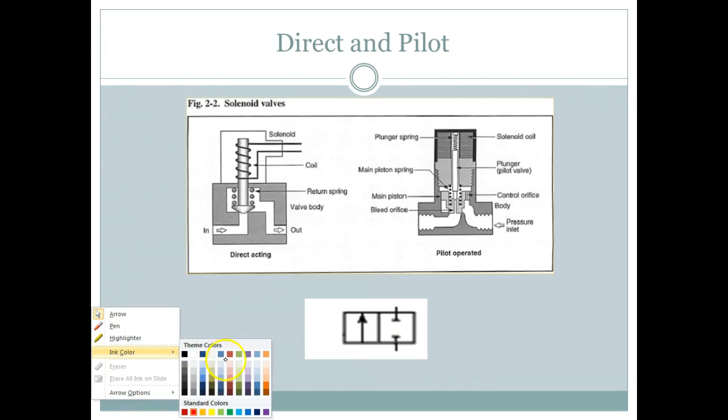So what you got to picture in your mind is you got to picture these two blocks. Now the outside, these guys right here never change positions. Oops, sorry. So these things never change positions.

And what we do is we're going to shift this thing over. So what's going to happen when we shift it over, then this is going to come over there and it's going to line up with the pipes, and this over here is going to be over here. That makes sense.

So what you got to picture in your mind, they draw the valve in its normal position. So this would be what we call a normally closed valve. And then when you turn it on, in your mind, you got to see that symbol shift over. And when we shift it over, what lines up? Well, that arrow lines up now. So now the fluid can flow in the direction of the arrow up to our actuator.

And this would be a symbol of what we call a normally closed - what would we say - two-way, two-position, normally closed valve.

Now we hadn't showed you how we shift that thing, and this is the way these different operators work. We can shift that thing manually, or we can shift it electrically, or we can shift it with fluid. And that would be what we call how we operate it. The book calls it actuators, but I call them operators.

We can shift it manually, or we can shift it electrically, or we can shift it with fluid pressure. We call that pilot. So we can shift it with the pressure of the fluid itself.

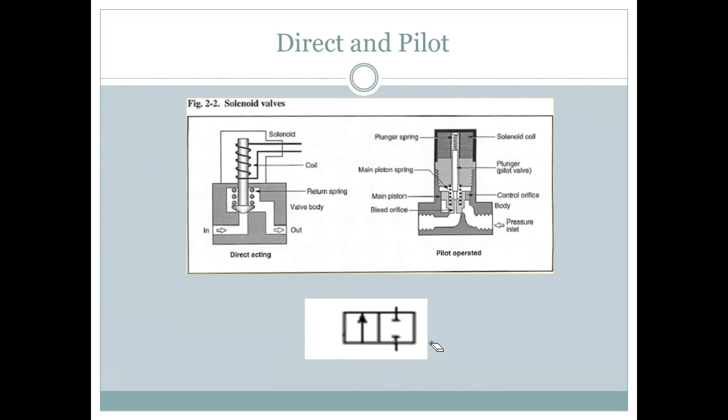Anybody have one of these? No? I got a couple of them going on right in here, right now. This is what your heart valves are - they're check valves. So when your heart is pulling it in, that's one valve open, right? The other valve is closed. And then when it pushes out, it opens up the other valve. So it's really, really neat. It's pushing out one side and pulling in the other.

We don't want the part that's going out. So your heart pumps - what would happen if you didn't have a check valve? Your blood, instead of going out, it would do what? Yeah, this is what happens a lot when people get electrocuted. Their heart goes into fibrillation. Their valve gets out of sync with their heart, which means you create no pressure.

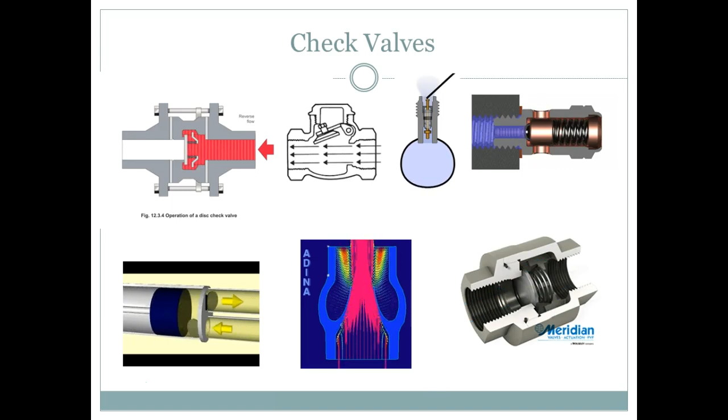So this is one of your simpler valves. And what's the symbol for this? No matter how it works, that on the top is the symbol, but we got one little more thing we need to put on it. If it's got a spring on it, then what they do is they put this little line on it like that. That means it's got a spring on it. It's also a symbol for spring. We don't have any resistors in here, so if you see it on our drawing, it's a spring.

I always wonder how they control a hydraulic jack, because if you use the same pressure... now what's that check valve in there? So when you push down, it opens up the check valve, and when you raise it back up, the check valve closes. So it doesn't let it flow back into your reservoir. So you got that reservoir in there, right? Same thing's true, but that's not true on the brakes - your brakes don't have to do that. But I was curious how at some point the pressure lifting up the car would be greater than what you push down. I know it'd be harder as you go along. So I always wonder why that pressure did not come back.

Because the check valve gets it on the way up, and then you got a bypass that bypasses the check valve, right? You understand? So when you go over there and turn that little thing, all you're doing is bypassing the check valve and letting the fluid flow back into the reservoir. That's all you're doing. So you got a check valve, and when you twist that thing in, which is probably a needle valve because you can control that flow pretty precisely, you can let your car down fast or slow. So you raise that thing out - in fact I've had it all the way out. It is a needle valve. Then you pump it. It's got that check valve that don't let it do that. So you got a lot of pressure going down, and when you come back up...

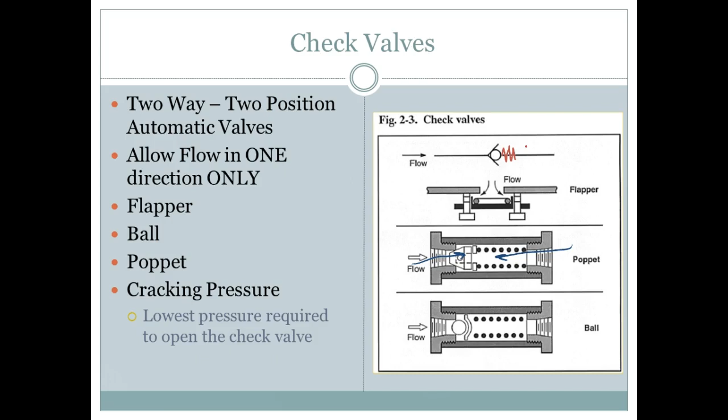Are we okay? Spring return - everybody okay on that? So what we got to understand is that if it's got a spring on it, and most of them do, because if it didn't have a spring, then you would always have to mount it in the same direction, right? You understand? But if it's got a spring, then we can mount it any way. So most of them have a spring. And if it takes 5 psi to operate it, then you're going to lose 5 psi going through the check valve. Everybody understand that? You got to overcome that. So you got to maintain that 5 psi here, right? You understand? Everybody okay?

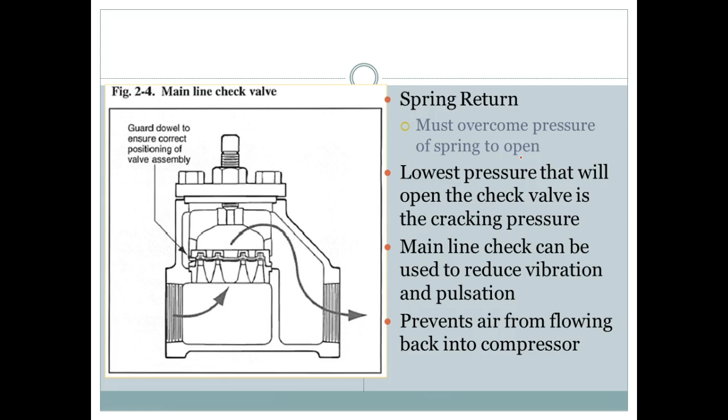So this is Nancy's right here. She was looking at this and just said, okay, what about the top one up there? How much pressure would it generate? So that's the spring. She's got 3 different pressures that operate the check valve.

By the way, this is the symbol of a pump, the symbol of a hydraulic pump. A compressor uses the same symbol, but on pneumatic, that triangle you see right there won't be filled in. So that's basically the big difference on the symbols - hydraulics, if it's got any arrows, they're going to be filled in. If it's not filled in, then that's going to be pneumatic. So a compressor would have exactly the same symbol, but the arrow would not be filled in. So what about the top one? How much pressure would that generate?

It's going to generate as much as the pump will do, because the flow is against the air. The flow is seating, right? Do you understand? Yeah, the flow is pushing the ball into the seat.

It won't flow, so how much pressure? We don't know. Now look at the bottom, they're pointed in the right direction. So the flow is against the air, and you can see what's going to happen when it flows. What's it going to do with that ball? It's going to push it back. So how much pressure would our pump generate here?

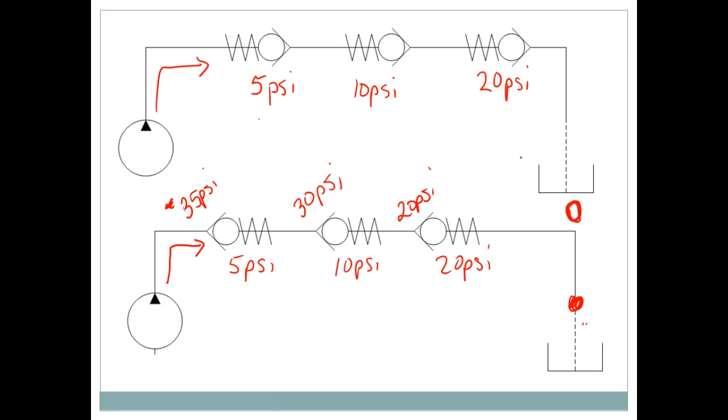So what about on the top one? No flow. What about on the bottom one? No 5, the other 2 won't open. As soon as that top one opens at 5 psi, then it goes over this. Now we have 0 psi. We have 5 psi on the left, we have 0 psi on the right. So the 10 and 20 would never open. Y'all understand that? Yes.

I don't know why she did that. By the way, on the right hand side, that's the symbol of a reservoir. Most people call that a tank. So on a hydraulic system, we have to have a tank, right?

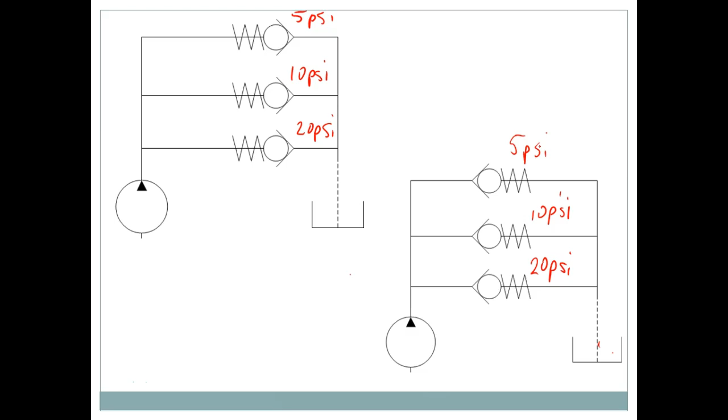They don't have power supplies on them. A lot of your big ones and more expensive ones have computers and everything and proportional controls. But a lot of your older earth moving equipment, it's either go or no go, right? And they have that, it's a lever operator.

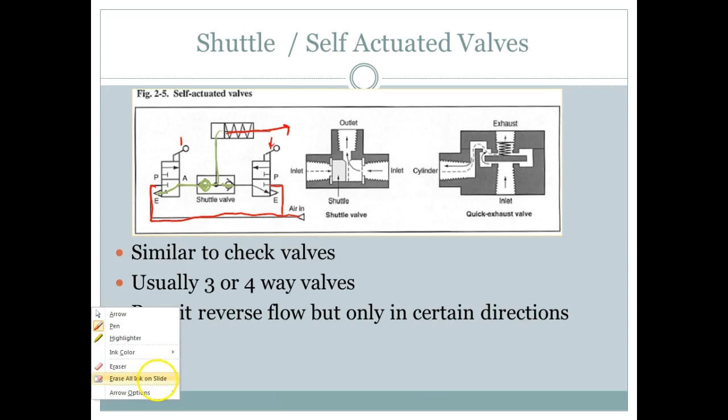Shuttle valves, are we okay? And that's the symbol of a shuttle valve. How do they do it? Well, I don't really care, I mean, it does it. How they do it, I don't really care, because all I need is the symbol, then they're all going to operate the same, no matter how they do it, right? Does that make sense?

This is the symbol of the shuttle valve right here. We okay?

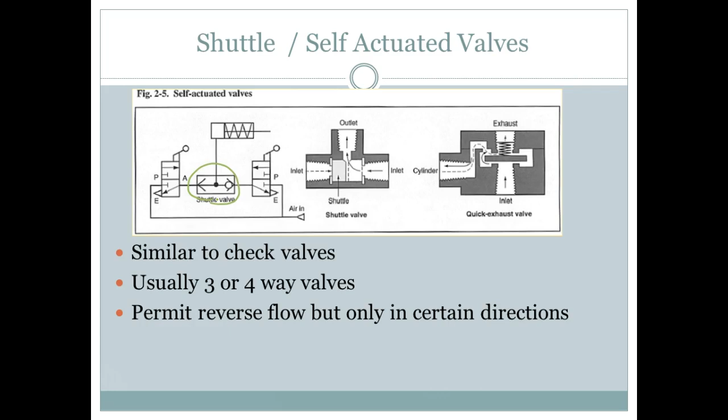And this is a shuttle valve, this is animation, and you see it here. They're using a flap, so when this guy comes up, the flap moves over to the left. When this person pushes at the valve, as long as the guy on the right has his control passing fluid, the guy on the left is blocked off. So what's neat here is they're showing the what in the symbol, showing the valve shift back and forth. So this is a self-actuated valve.

OR logic. If you're looking at the PowerPoint, OR logic is not up there, I just say it.

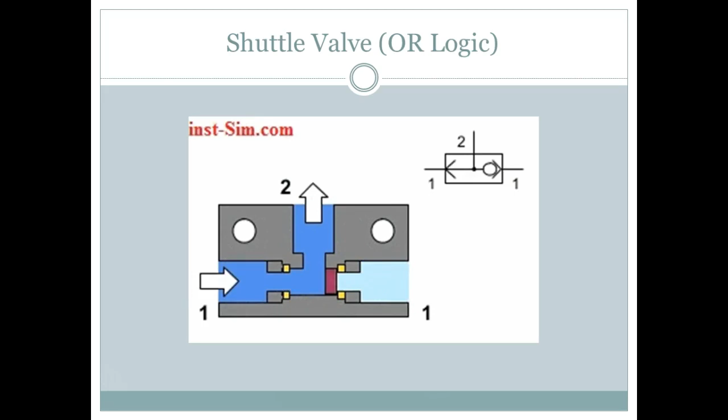A reciprocating disc is just a disc that's got slots cut into it. And then when you move it, what does it do? It lines up.

This is the one we're dealing with, this is called a spool valve. And it got the name spool because when we draw it like this, it kind of looks like a spool that you wound thread on. And somehow we position that spool to control the flow.

Now this would be manually operated, or I don't know what's over here, it looks like a manually operated. So what a manual operator looks like is this: it comes over, and then it has that up there, and it almost looks like the thing, doesn't it? And it's drawn in this position.

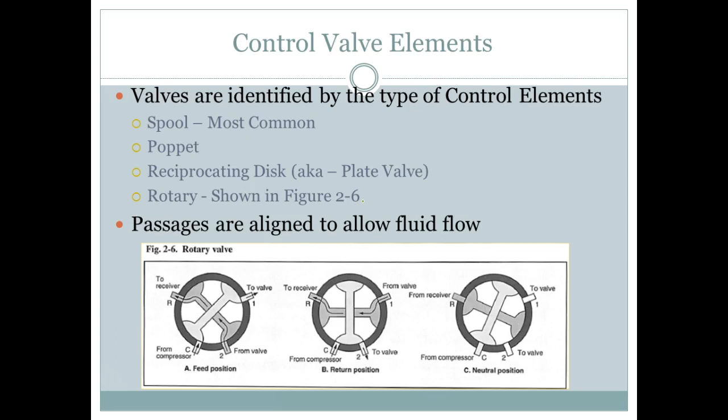Wrong way: if the line's not on the outside, then you know it's not normal, those lines are not present. These lines right here show you the normal position of the valve, the ones that come out of there show you the normal position of the valve. And they don't have to be, they could be on the right or they could be on the left, but that shows you the normal position of the valve, and that's what we're going to connect up to.

So if I was going to control something, then I would take this right here, right? This right here would be pressure, and this right over here would be whatever I'm trying to control, like a motor. A fluid power motor, a pneumatic fluid power motor, usually doesn't need an exhaust. We don't have to bring it back because why? It's got its own exhaust on it, so it sits there and spins. So this would turn a pneumatic motor on and off.

Now a hydraulic motor, we're going to have a tank, right? You can't spill it out. We can use this to control a cylinder because once we push that fluid out, we got all that fluid in the back of that cylinder. We're going to have to get it out of there somewhere, so we would have to have an exhaust. But this would be a good one to control fluid power - a pneumatic motor, not a hydraulic motor, a pneumatic.

What I'm saying, I have seen guys manufacture those boxes with no outlet. But you hadn't seen it, not unless you're just looking at symbols like this. Because what you've seen is probably this. Let's draw it like it would be in real life.

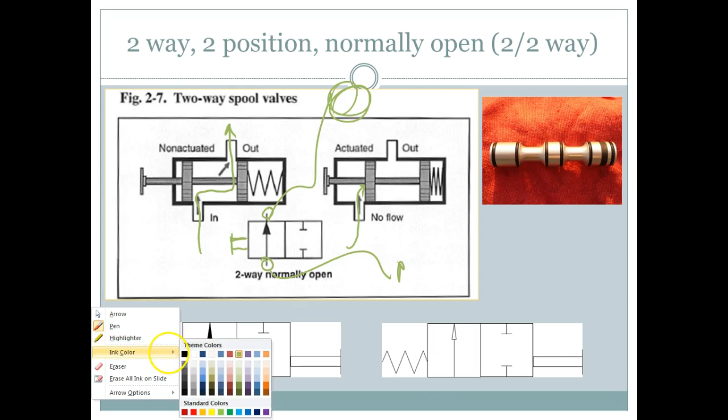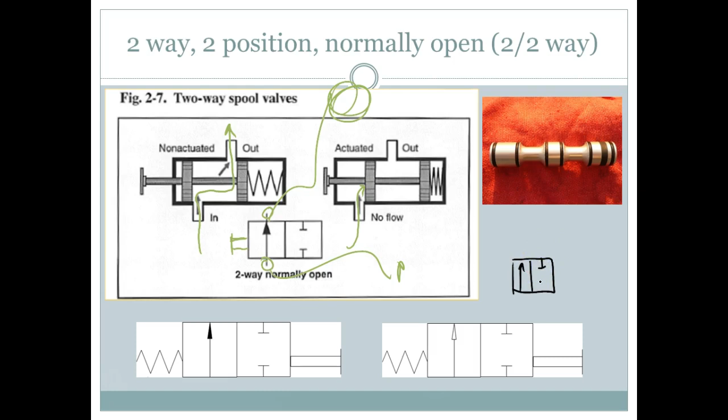So I would have my symbol, and then I would come over here and have this, and I'm going to put two T's right there. Then I'm going to take this and draw it off to somewhere, up to a motor. And down here, I'm going to take this back to pressure. And that's the way it would work.

If you don't have those, all we do on the symbol is just show you the normal position, but this is where you hook your things up, you know what I'm saying? We draw these things, we don't draw them sideways, we don't draw them upside down. The industry standard is pressure and exhaust on the bottom, and your working ports are going to be on the top.

And here they're showing manually operated spring return. So what they've done here, we don't know - I don't know if it's normally open or normally closed because I don't have what? Yeah, you don't show me where the actual ports are.

So we're drawing just the little lines, but in real life, those little lines are going to be going somewhere. Okay guys, let's take a 2-minute break.

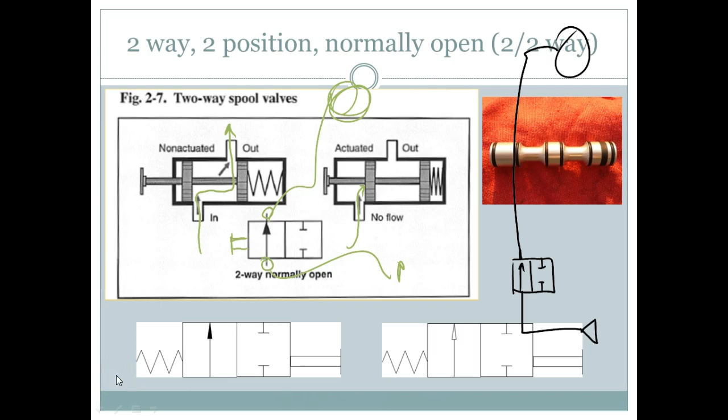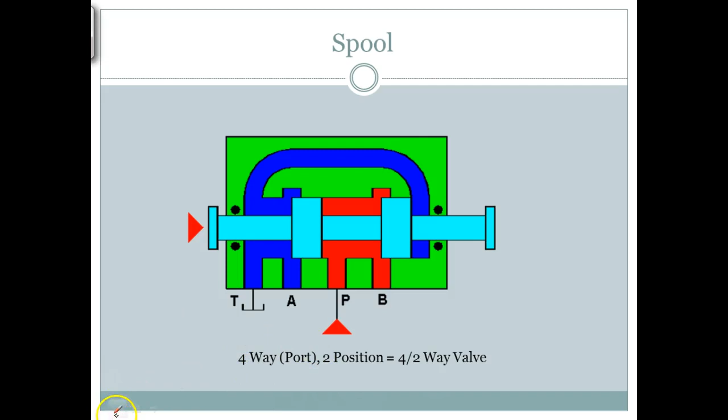So the normal position - normally on a 3-position valve, the normal position is the center position. So we draw like this, right? Everybody okay? In fact, I need to make this one over here bigger, let me make it a lot bigger so I don't have any problems.

So what we do here is notice when it's in the center position - I paused it. So right now, when it's in the center position, everything's blocked off. So I'd come over here and do this. We're okay so far? And then when we go to the left position, it looks like it's sending - so up here we would have A, B, and down here we would have pressure and tank.

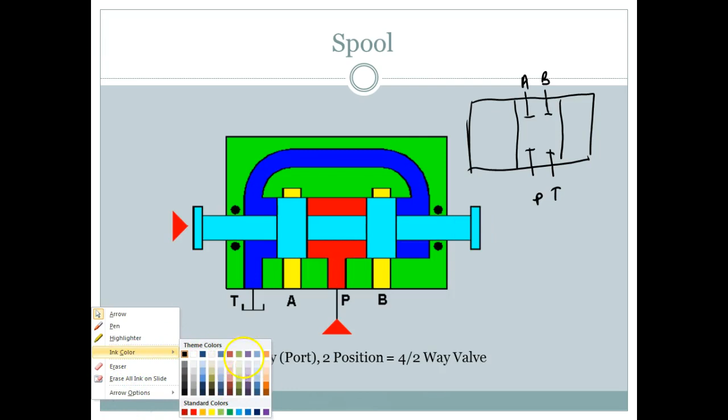And then what I would do is, I did it again and paused it. So when we're in the first position, we're routing out port A. So I'd come over here and - so we're taking pressure out port A. As soon as I do this, it's going to stop, but I got it now. So we do this.

That makes sense? Then if I come over here, what would I do? Let's swap around. That would be the symbol of this. Of course, I needed to go up to the top, and this would be a 3-position valve - 4-port, 3-position, or 4-way, 3-position. But that's not the way we say it. This is the way its nomenclature works.

We start off with the number of ports, so I'd say 4. And then I say the number of positions, 3... then we say what? I know it's backwards, but that's the way they do it. So we would call this a 4-3-way valve.

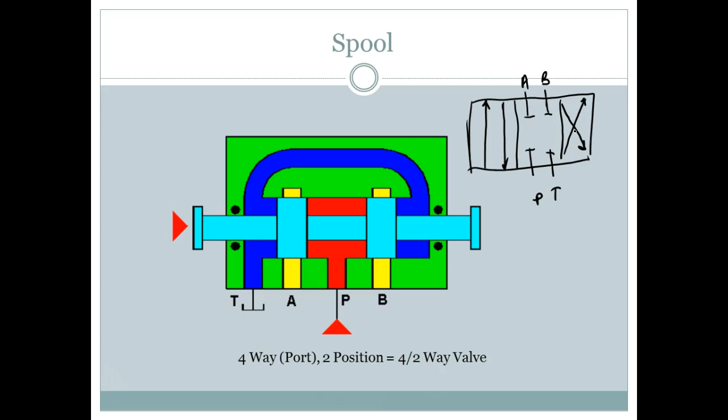I know it's backwards, but there's nothing we can do about it. That's the industry standard, that's the way you would order it. So we'd say, we don't specify if it's a spool valve or whatever, we say it's a 4-3-way valve, manually operated. If we put a spring on the left-hand side, we'd say it's manually operated spring return.

So that would be the industry standard if you're going to order this thing. We start off with a number of ways, right? Then we put a slash, then we put the number of positions, and then we say ways. So this would be a 4-3-way valve. It's not like if you don't like your name when you get older - what can you do, change it? This would be like before you're 18, you're stuck with your name. So we can't change this name. They start off with a number of ways, then we put a slash, we put the number of positions, and then we put ways. That's the way it would be written. The way we say this is a 4-3-way valve.

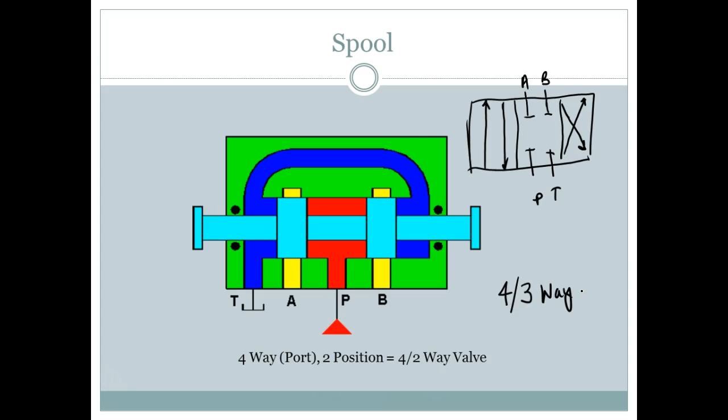So we got a bunch of valves up there, and different symbols. They're all manually operated or lever operated. The first two on the top, these are spring return.

So notice the one on the top left, there's nothing over there. We get over on the B, so B, the thing would be retracted, right? And then when I operated it, it would do what? Something's going on here, that's wrong. Yeah, B's wrong, A's right. Why is B wrong? Because if you let go of the lever, what's going to happen? It's going to move that thing to the right. It's drawn in its normal opposite position. So what do we mean - is somebody going to stand up there all the time and do that? So that's wrong, B is wrong, A is right.

So y'all understand what I'm saying this way? Because the spring's right there, so what would be the normal position with the spring on the right hand side? What has to be the normal position? It's got to be pushed to the left. There's no way in the world that symbol could be right, because the spring is on the right hand side. If you let go of the lever, what's the spring going to do? It's going to push it back to the left. Well, that's the normal position - the normal position without you touching that thing.

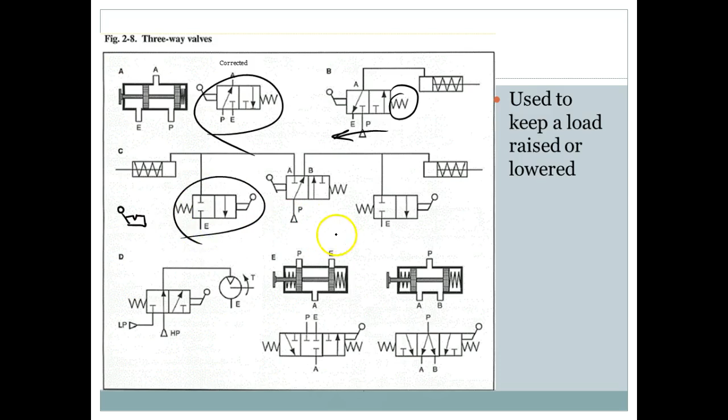Well, if it was a locking lever, it would have another symbol - we called it a detent. So what I would do is come over here and do the same thing, and put a little notch in there. And what that means is once you moved it, it would stay in that position. The way these are drawn, guys, if we let go of that thing - well, it looks right on some of these. This one looks right to me. This one looks wrong, this one looks wrong. This one looks okay - this one's definitely okay because it's in the center position.

So anytime we have a 3-position valve, then the normal position is going to be where? In the middle. And then, of course, we got springs on both sides. So what happens if you let go of the lever down here on B on the bottom - it's going to automatically go in the middle. So some of these look wrong. I don't know where - is this in the book?

No, number on A and B, I think it's all swapped. The exhaust doesn't make any difference. What we're going to do is, normally on pneumatic valves they don't put the P, they don't put the T, they don't put A - they use numbers, and the pressure port is always 1, and the exhaust is usually on the right of the pressure port.

Well, no, on pneumatic they number them. On most hydraulics they use letters - they use P, T, A, B. On pneumatics, on the valves they use 1, 2, 3, 4. So your working ports are going to be even, and your pressure ports are going to be odd.

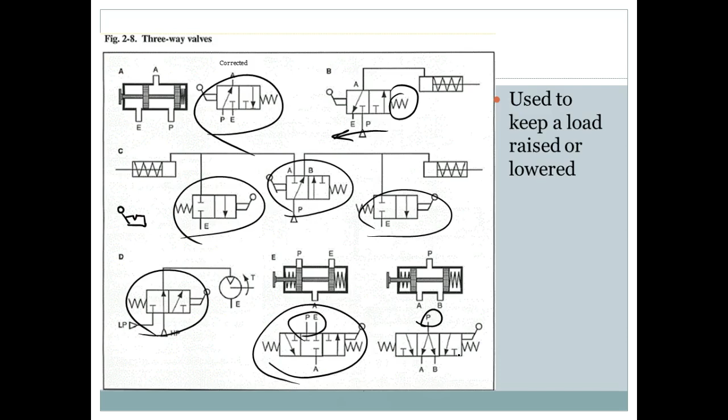Well, here's the pressure ports on the top. What we do, and I'll show y'all some diagrams, the industry standard way of drawing fluid circuits is from bottom to top. The pressure, now when you hook them up, it don't make any difference if you put the pressure port on the top or the pressure port on the bottom. But what we do when we draw it, industry standard says your pressure's on the bottom. So the way we draw these is they're drawn like this.

So what you do is you have your pressure, your power source, on the bottom, then you have your control, and then your actuators on top. This is the industry standard way of drawing a fluid power circuit.

Now when you get out there and hook them up, normally all your ports are going to be on the bottom of the valve, right? Because it's going to mount on the base. And they do that because you can buy the valve and mount it on the base, or you can mount it on the manifold. You understand what I mean by manifold? Just like the manifold on your car.

It's got one common pipe inside that manifold that carries the pressure, and then we got one common pipe that handles the tank or the exhaust. And then you have taps on the side of the manifold for the working port, so you have where it screws into the side of the manifold. And that's very, very popular because you save so much space, right?

Instead of having to put a base, you can cram those things in there right there together. So if we went over there on the manufacturing lines, every one of those guys use a manifold.

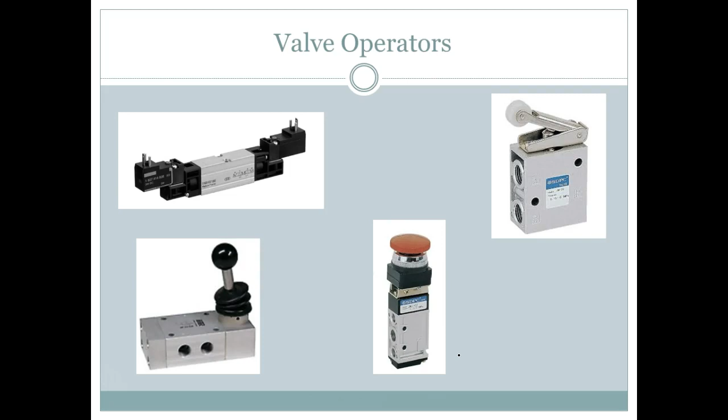So all our fittings are quick disconnect fittings, because we're going to be doing piping. This is the problem we had with the hydraulics, the quick disconnects. Look, they're very similar to the ones you get for a pneumatic system, except they're high pressure, but they work the same way. You don't ever pop that thing off without hearing that check valve. Well, when that happens in hydraulics, what squirts out of it? We got a little hydraulic fluid, so we had problems.

So solenoid operated, y'all see how the solenoid actually works. The valve that I passed around is solenoid operated, so that's when you see the 3 prongs on the side. Most of them have manual overrides on them. So if you had a screwdriver or something, if you look, it's got a little thing in there you can push in and actually manually override it. Can you see? So the manual override.

So we can literally take a screwdriver or something, put it to the brass thing and push that in to manually override. Now, of course, anytime you manually override, you've got to understand the consequences. You're taking something away from automation.

It's got all these safety features built into it, to keep you from getting killed. And you go in there and manually override it.

We had a guy get killed out at the top of No. 8 blast furnace when I was out there. It was a continuous cast furnace, and they brought a big belt up to the top, and they had to keep pressure on it. The belt would drop into a hopper, they'd open the top door, it would close, then they'd open the bottom door and let it fall down into the furnace. They were having problems with one of the doors, I don't remember which one. They went in there and locked it out, did all that stuff, disconnected it, and told the guy to go push in the relay. He pushed the relay in for the bottom door. They didn't lock that one out, and it killed him. So we're talking about that, you need to understand the consequences of the manual override or what's going to happen.

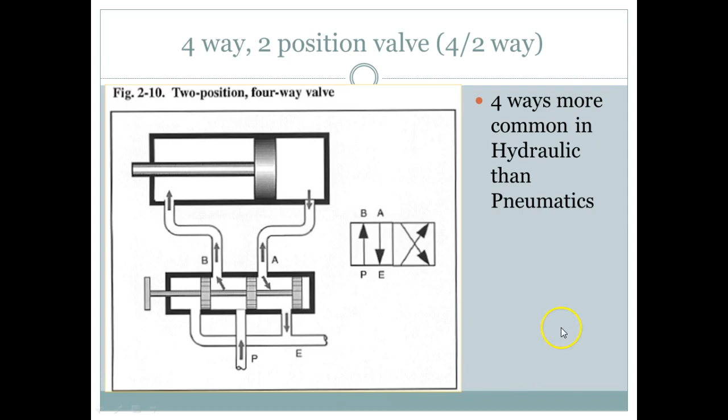So I need to drop that off, right? I didn't put that down. Who put that? Wasn't me.

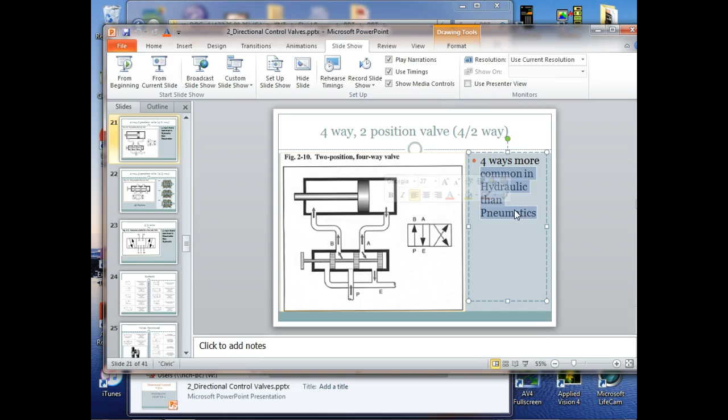So this would be a five-way. This would be a what? No, four-way. So we'd say 4 3-way valve. And then we put the operators on the outside, how we operate the valve, how we move it. This would be a closed center.

This is very popular in pneumatics. Normally in pneumatics, if we can't vent the pressure - a lot of times in hydraulics, if we're not using it, we just send it back to tank. Pneumatics, we don't ever just pump it back out to air because you lose your compression. So anytime we're not using the air in the pneumatic system, we're going to block it off, right? Does that make sense?

PEAB. And of course you can see it up here. Now this is kind of misleading because it looks like it's that. But in actuality, what they don't show you - and it could be a 5, so this is where we get our 5-way valve - the symbol is telling me that inside the valve, these two ports are connected together.

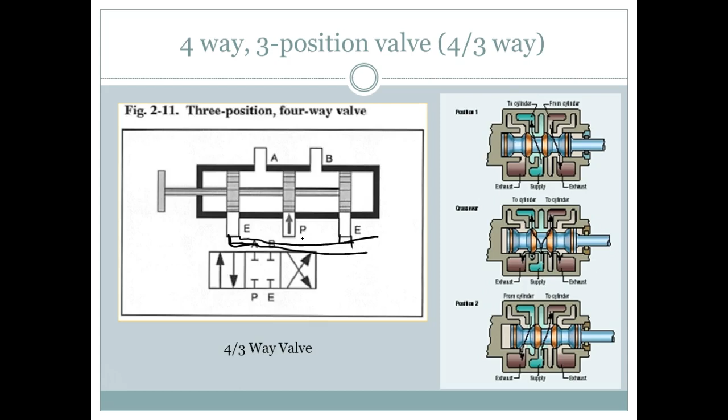Y'all understand? But I can see where this is confusing because when you look up there at the actual spool, you see 5. My drawing was awful, guys. I would fuss at y'all if y'all did that. And this is what they showed you right here.

So this is what they're showing you. So inside the valve, those 2 exhausts are piped together. Now we do sometimes bring those two exhausts out, and that's the only time you get a 5-port valve - when they don't pipe it inside. Y'all understand? And this is still a 5-port valve, because when I hook up to it - this is a 4-port valve, because when I hook up to it, I hook up 4 ports.

The only way I've ever seen a 5-port valve in pneumatics is if they bring both exhausts out. The advantage of doing that is the exhaust on the left is going to have more friction on it than the exhaust on the right, because it's got further to travel.

Another advantage is that we can throttle each one. Throttle means we can control the flow, and we'll talk about that. So on pneumatics, if we're going to control the flow, we control the exhaust. We'll talk about that too, and why we do that.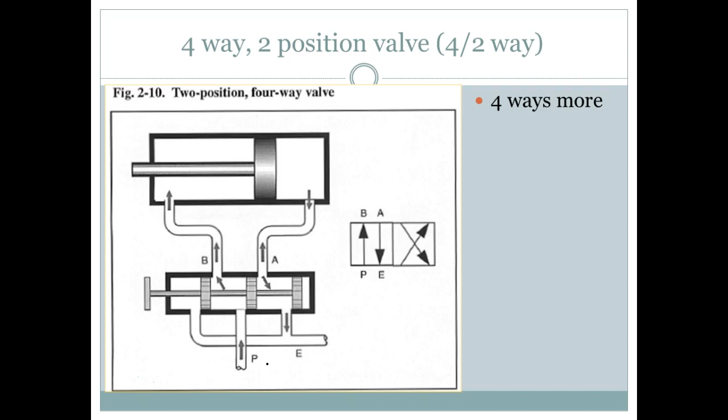I'll have to. Okay? Okay? I'm going.

5-way valve, more common in pneumatics than hydraulics. Here they're talking about high pressure and low pressure—I think they're talking about that, and putting an exhaust in the center. I've never seen a valve like that.

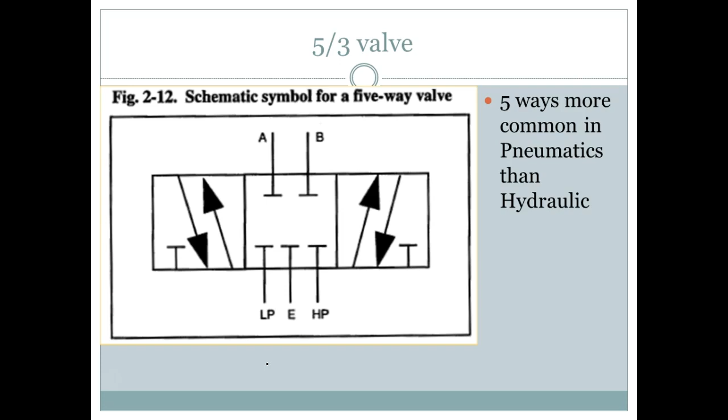Here's some of our valves, and here's the name: directional control, two-way valve. That's the industry term, right? 2-2, so it's 2 ways, 2 positions, closed. So this is normally closed.

The second one on the left, this is what? A 2-way valve, normally open. And the third one, this would be what? A 3 2-way valve. So notice the number of ports—they start off with the number of ports, 3.

We put a slash, put the number of positions, then we use the term—guys, if it's confusing, all I can say is I'm sorry, that's the way it is.

Closed in the normal position—well, that's a normally closed valve. A 3 2-way valve, open in the normal position. Don't understand that? Yes or no?

A 3 3-way valve, closed in the neutral position, which is the center position. Normally they say center, but here this—wherever they got this from. I think I did this; I think I got these actually out of the Festo book.

A 4 2-way valve. Now, 4 2-way, right? You understand? Then we have a 4 3-way, closed center. Then we have a 4-3, exhaust neutral position. This is what some people call a floating center. Why do they call that a floating center? Remember, your actuator is going to be hooked up to 4 and 2.

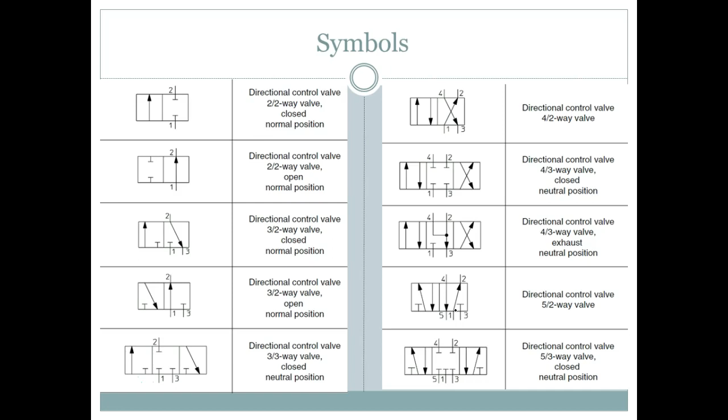These are some other things we'll look at. We have what we refer to as a service unit. So the service unit on a pneumatic system, what do we have to do? Normally we have a filter.

Are we okay? No, I just put this one up there. Like I said, this is the filter. What's this? The regulator. Allows you to regulate the pressure.

Anybody know what this is? No, this is not a valve. We're controlling the pressure. It is a valve, but this is the valve that we use to regulate.

So normally, when we run compressors, the most popular compressor out there is what we call a reciprocating compressor. Instead of making that motor run all the time, what do they do? They have what we call a maximum pressure and minimum pressure. It's got a band, and when it drops below the minimum pressure, the compressor kicks on. Then it comes up and goes up to a maximum pressure and kicks off.

Well, where do your tools come in? What would happen if you ran your tools inside that thing? Well, all your torque and your speeds and everything would be constantly changing. So what we do, if I tried to run it while the compressor's running, my air would be really jerky, because the compressor's pushing it in, pushing it in, pushing it in.

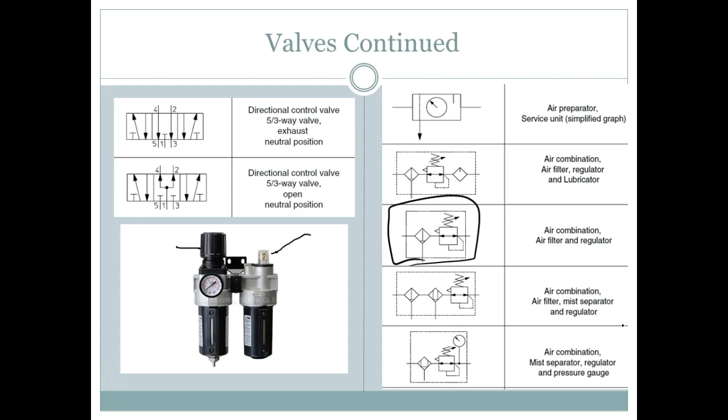So I think these are covered in another chapter. Why we went ahead and stuck it in here was because we're going to use them over there. These are our operators.

So manual operator, you okay there? Lever operator, hand operator, cam operated, solenoid operated, manually operated. The manual operator is just a generic operator for manual. Spring, everybody okay there? Pilot.

So what do I mean by pilot operator? Fluid actually operated. Yeah, button operated, foot pedal operated. And this is what I was talking about.

If it's got detent, what will detent do? Once you move it in there, it'll lock it in that position until you move it again. But anytime any manual operator's got a detent.

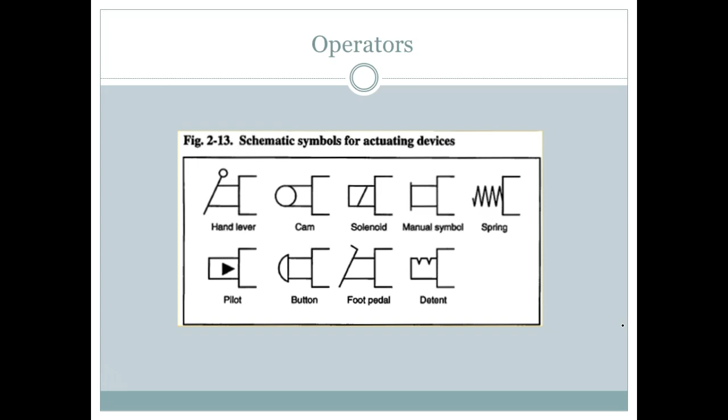Now it's becoming very popular on pneumatics to have a solenoid, and I'll let you show y'all the symbol. Here's some more. These are all the same thing, right? This is the guy right here. This is a solenoid pilot operated valve.

The problem we have is your little solenoid cannot generate a lot of force, but we might have to control a lot of force. And the bigger force and flow you gotta go, that spool starts getting really, really big. And all of a sudden now you got a cylinder, your solenoid can't push that through. But what can the solenoid do? Well, the solenoid can open up a little tiny valve and let the pressure that's already there come up and push the spool.

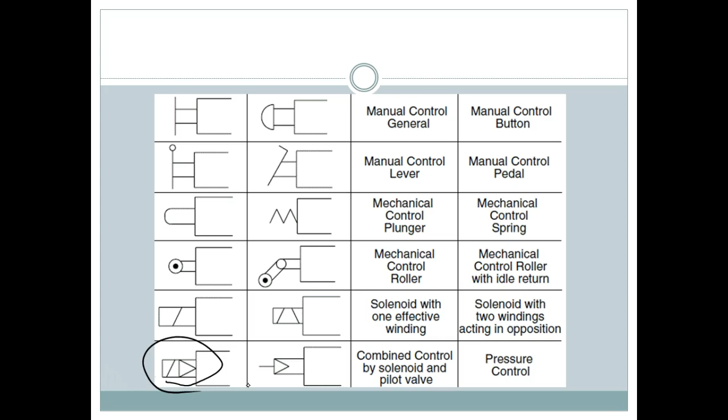And these are common. In fact, every one of them over on our lines are like that. I don't know if they use the symbol or not. Yeah, this guy right here. Notice the way Festo does it. So they got the solenoid on the left, and they got the pilot symbol. This is the way Festo does that symbol.

So what the solenoid does, it's got that pressure there already. It just opens a little tiny valve, opens it up, pressure comes in, hits the side of the spool, and shifts the spool.

All right, Nancy, bye-bye.

So that means this is the manifold inside this dashed line here, and then the valves mount on the manifold. So you see they all share the pressure. So here's the pressure, this is a disconnect right here. So notice it's got a detent. So we use this to actually turn the air off and on.

Lock lever, it's called a detent, so it'll stay in. So if you turn it off, it'll stay off. If you turn it on, it'll stay on. That's what the detents are there for. You see that?

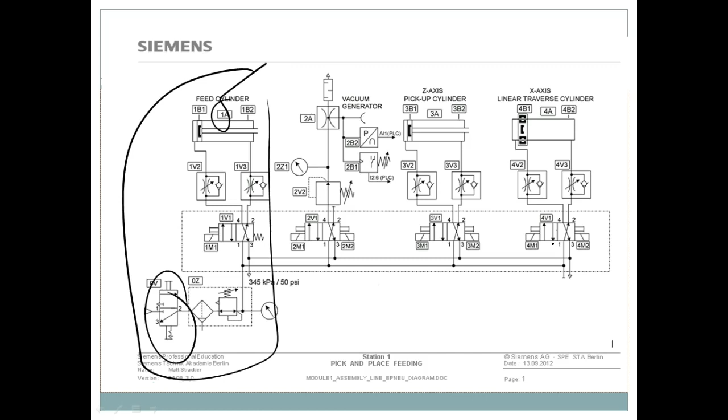So we start off with the pressure source. We go up, there's no curved lines, all the lines are straight, just like in electronics when you draw schematics, we don't do loops. Everything's straight, right? You understand that? And we draw the pressure sources at the bottom, and then we work up to the actuator. The actuator's at the top. Everybody okay with that?

These are flow control valves, we'll look at it in a minute. So this is a 4-2-way valve, solenoid operated, spring return, right? This is a double acting cylinder with a magnetic piston. So that little U right there means that thing's got a magnet on it.

You won't run into many of these on hydraulics, because hydraulics usually have to have steel cylinders. But in pneumatics, we use aluminum cylinders, and aluminum does not impede a magnetic field. A magnetic field applies to aluminum like it's not even there. And then what we do is we literally have sensors that we put out on the side, called reed switches and Hall effect sensors, that tell us when it's fully extended and when it's fully retracted. We've got some valves over there, I'll have to show y'all that, and they're operated by that magnet. We can put that on the cylinder, and when it extends, it'll open the valve, and then we can use that to do something else if we didn't have a magnet to do that.

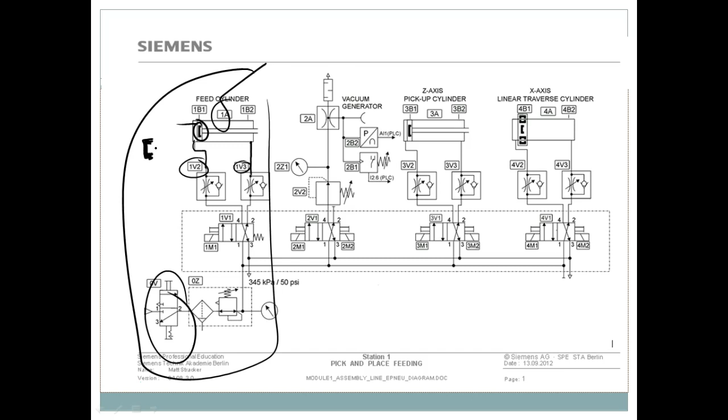These are what we call flow control valves. So flow control valves do exactly what they say they're going to do. What did I say? What are they called? Flow control valves. So when I follow this up, I want to do a different color. So I'm going to do pressure, let's do it in red. So here's my pressure, we'll just use this first one. It's in its normal position. It's going to go through there, come over here, and bypass the flow control.

It's going to push the check valve open, and it'll come up here. And what's it going to do to the cylinder? This cylinder should be retracted when we turn this on, because this is the normal position, right? You understand? And then, of course, what's going to happen to the exhaust on the other side? Well, the exhaust on the other side is going to come out. It can't go through the check valve, it's going to close the check valve, so it's got to go through the flow control valve. It's going to come up, go back through here, go down, come down, and do the exhaust.

Now, in pneumatics, on a double action cylinder, if we're going to control—so what do you think the flow control valve does? It controls the speed, because it controls the flow. So the pressure determines the force, the flow determines the speed. Does that make sense? Okay, so what we're doing is we're making the exhaust go through the flow control. We call this meter out.

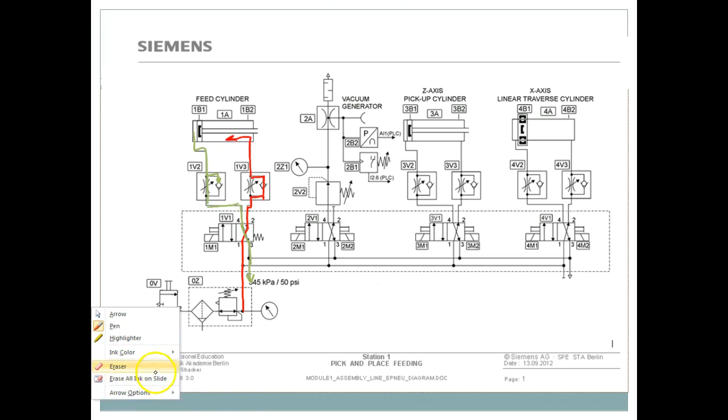So if we shift this thing the other direction, then what we got to understand is everything swaps, right? So we move over here, I'm just going to move the ports over there so we can see them. But what it's actually moving is the valve. So this port right here would shift to here, this port right here would shift to there, and then my pressure would come in here.

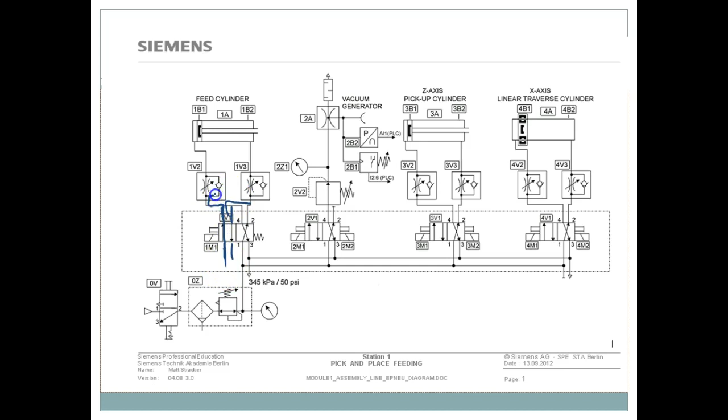So now what would happen? Then the fluid would come up through here. It's going to go up here now, it's going to go this way. Then it's going to go through the check valve, come over here, and push it out. Then the flow is going to come through here, this is going to block it, it's going to go through there, and then it's going to come over here and go back to the exhaust.

And that's what you got to visualize in your mind, you got to visualize those doing what. This is what I've done for you over here, right here. I've traced the flow, so my pressure's going here. Took me a little while to do this, guys. And when I go to the next one, I'm showing my solenoid is pushing me to this direction.

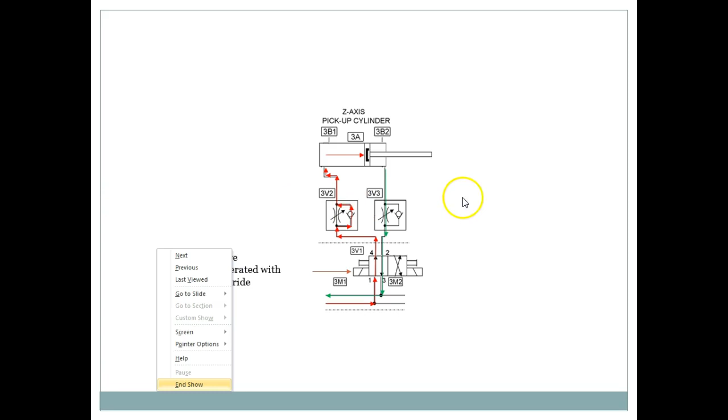And then this is what literally happened. But it don't happen on the, you gotta visualize it doing one, shifting. You gotta visualize it. It's not gonna shift. Well, that was done with Microsoft Paint, by the way.

So right now the solenoid's pushing it to the left, and we turn that solenoid off, and then this one does what? This is what you got to visualize in your head, you got to visualize that whole thing going on. And that's the hard thing about it, but that's the way it is.

So they draw the valve in their normal position, right? You understand? And then you got to realize that whole thing doing what? Shifting over and everything realigns. So you can see this.

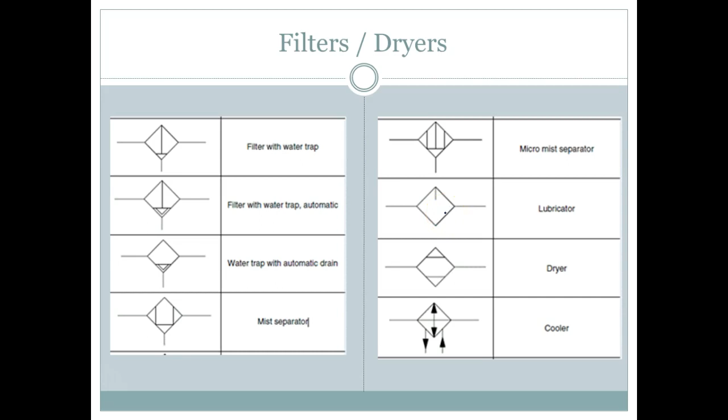That's not animation, that's done with 2 PowerPoint slides. And then I brought it up in Microsoft Paint, cut it out and pasted it. We do have a package that I need to install on my computer, it's called FluidSIM, which is really neat, because when you animate it, you actually see the valve shifting, which is pretty neat. But on a diagram for fluid power, they're going to draw it in a normal position, and that's what you got to visualize in your whole head. What? It moves. Sure.

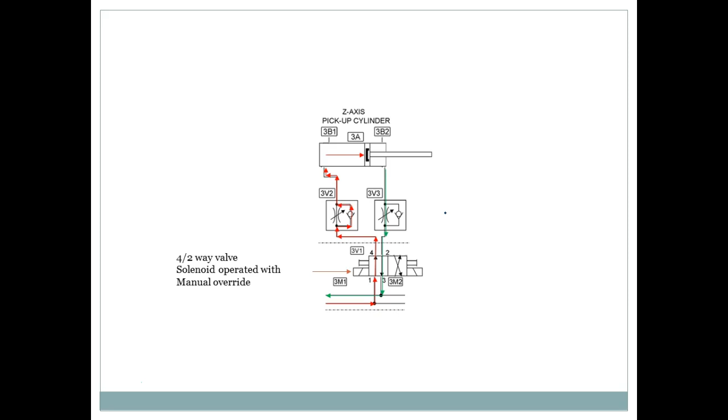Notice how it flows through, the exhaust goes through the flow control. Those check valves are automatically operated, not manual. We don't touch them - they automatically do what they're supposed to do. They're controlled by pressure.

So we live with this, and we have to manually see that in our head. That whole thing shifts over. By the way, this is really neat - Festo does not use spring return, they use pilot return. On the right hand side, it literally pilots that thing and uses pressure to return it. Where the Amatrol line, they either use solenoid return or spring return.

It took us a little while to figure that out because we'd never seen it before. But then you get into it and realize it makes sense that they can pilot return it. This is why the manifold is so much more complicated. On the Amatrol lines, the manifold is on the bottom. On the Festo line, all the porting is done through the valve, and the manifolds are on the outside. Really, really slick - all this porting, the valves all line up.

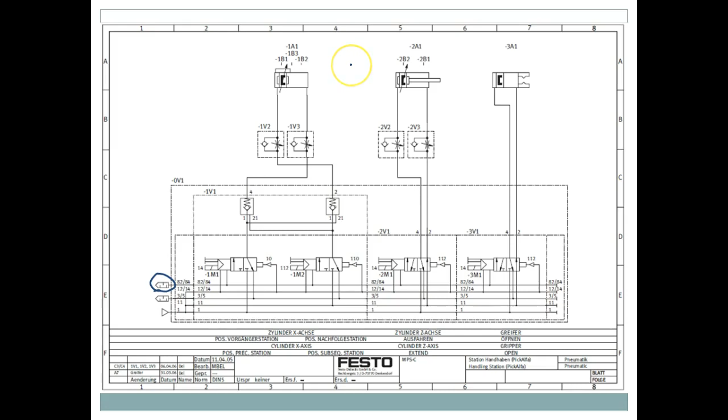So I could get this from Festo or from Amatrol or Siemens, and the diagrams are the same. This is an Amatrol line - Amatrol was made here in the United States. So this is the Amatrol line, drawn by Siemens, but this is the diagram for that. Are we okay?

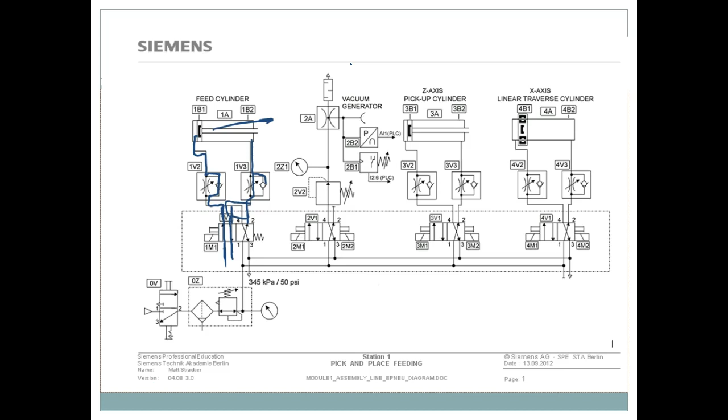Anything else on there? That guy in the center is using Bernoulli's principle. Notice it's choked off - that's the vacuum generator for the line, and that's the symbol for that. We call it a Venturi vacuum, but it actually uses Bernoulli's principle, where if you speed it up, the pressure goes down. It actually sucks air in.

That's it. Yeah, M is solenoids. A is the actual actuators.

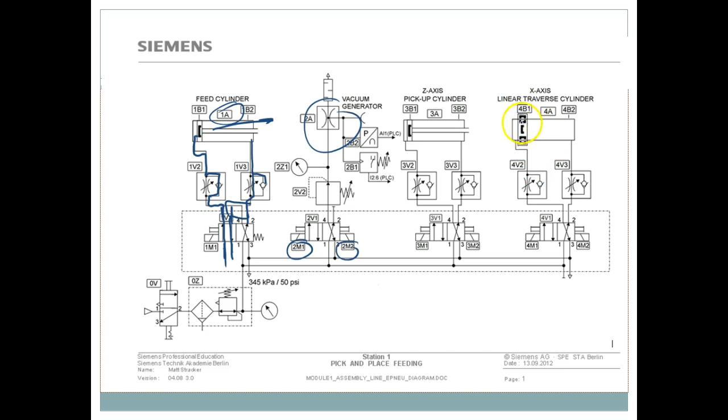This is a rodless cylinder. The rodless cylinder, I think I showed y'all that over there, actually works on magnetics. So the piston actually has big, nice magnets on it, and then the carriage on the outside just clamps onto those magnets. So this is what we call a rodless cylinder.

Now, what's the advantage of a rodless cylinder? The stroke. You're not limited to the stroke. You can make these things have 10-foot strokes if you want to. It'd be almost impossible for me to have a piston cylinder with a 10-foot stroke, unless you used a rod.

All right, so rodless cylinders, both lines, both the Amatrol and the Festo line, all have wires.

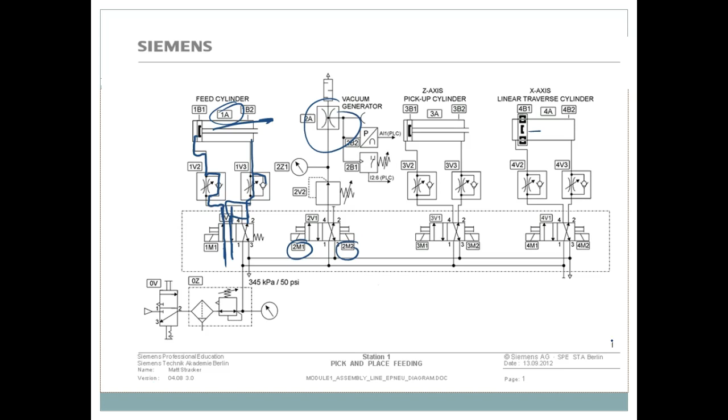And this right here, these are cushions, and this means they're variable cushions. What a cushion does, and these are in cylinders, we'll talk about this now, just to explain the system.

What a cushion does is it's got a rod that sticks out of the back of the cylinder, and when it comes flying through there, the rod jams into a hole. And then we control the flow through that hole. So what happens is the rod doesn't bump up against the end cap. So we call those cushions.

And then a variable means we've got a little tiny screw on the side that I can adjust to slow it down at the very end. So what we do is we use fluid to slow it down right before it hits the cap.

The cap is actually the end that's away from the rod, and then the end on the end of the rod, they call that the head. There's actually no cushion there. Some of them do put a piece of rubberized material in there, but they don't call those cushions.

When they say cushions, those are actually... I don't know if I've got a drawing of it, but so the rod actually comes through. So the cylinder, if we looked at the actual piston, it would actually look like this. Then it'd come over here to have this. And then over here we'd have the rod, and then right here we would have this. And then what happens, back here at the very end, we've got a hole. And when this thing comes flying back in there, this is full of fluid. And then we've got this little tiny hole that comes back and brings it back over to here.

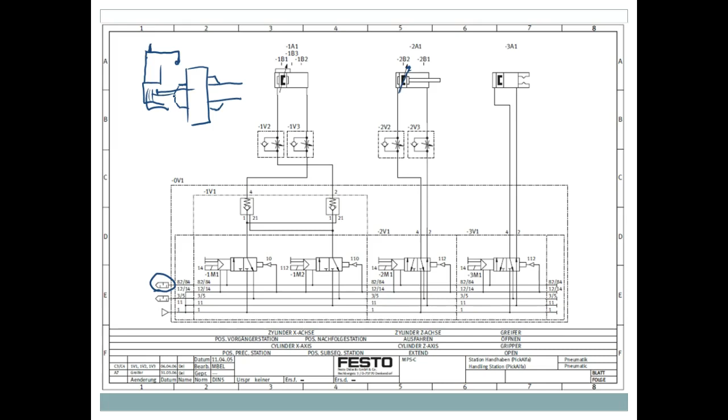So when we go over there and do the inventory. Okay. In hydraulics,

we have another worksheet that I want to do in class. We've got 3 circuits that I want to do in class to get y'all ready for what's actually on the test. Like I said, a lot of the questions, you can see, so we've got symbols. Symbols are on the test. All the symbols we went through tonight are going to be on the test, right? You know what I'm saying? All of them, pretty much.

And then solving... but the way the test is different is that you're going to have to solve for area. I wish that's the way the worksheet was worked out. So with the worksheet, what they did is they gave you the area on every one of them, so you didn't have to solve for the area. When you get a piston though, they're not going to tell you the area, they're going to give you the diameter, right? We call it the bore and the rod.

So let's work on these. Let me find them. I want to get that. And then after that, we'll go and try to inventory our kits. Here they are.